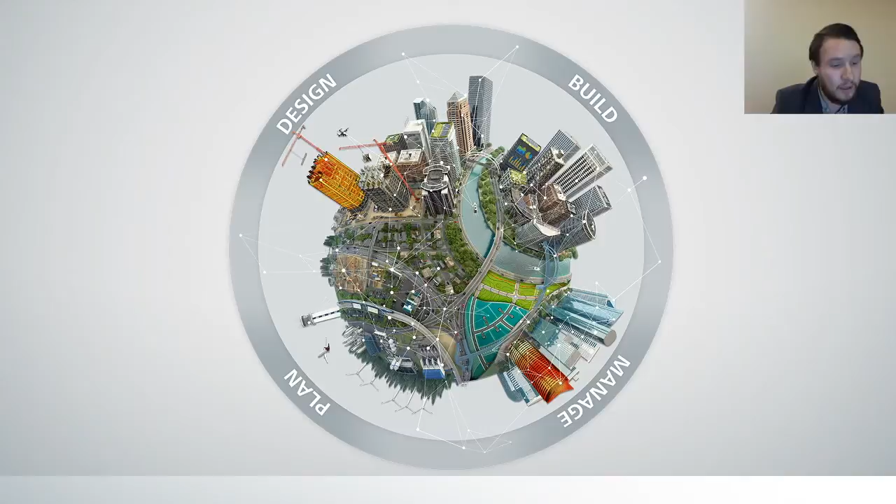Also, you can divide those phases into more cuts. So you can analyze the project, you can have documentation of the project, you can have fabrication, construction in 4D and 5D in time, construction logistics, operation and maintenance, renovation projects, and lastly programming after the building is already built and the owner wants to know all the information that is inside this model.

So the users of BIM. The BIM model could be used by all of the architects, engineers, structural engineers, and the circle goes on until the building is demolished. So building information modeling, BIM, is an intelligent 3D model-based process that equips architecture, engineering and construction professionals with the insight and tools to more efficiently plan, design, construct and manage buildings and infrastructure.

And you can see why you should use BIM. You get a lot of benefits from it. Most BIM users get a lot of benefits: it can reduce errors and omissions, reduce rework, reduce project duration, increase profits, and maintain repeat business.

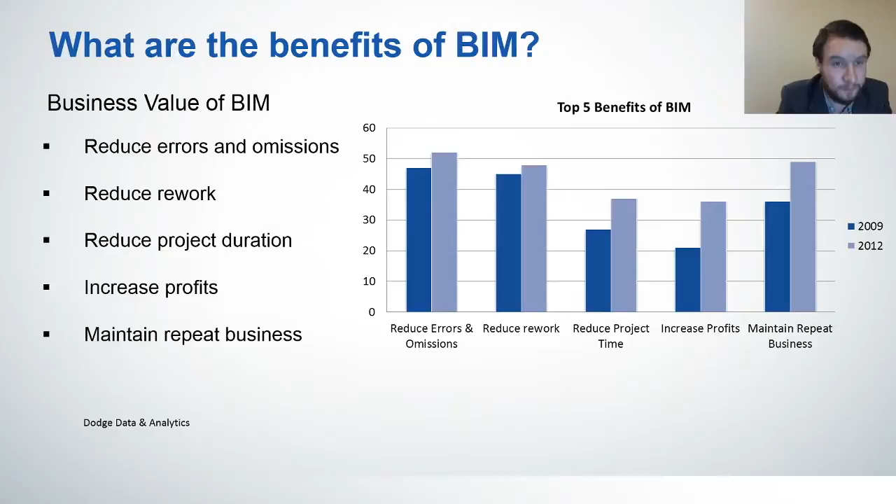So next we're going to talk a little bit about the software that's good for creating building information models. I really like this one chart that shows what software you should choose for working as an architect or an engineer. As you see, if you go throughout, there's Revit here and here. It's like saying BIM all the way.

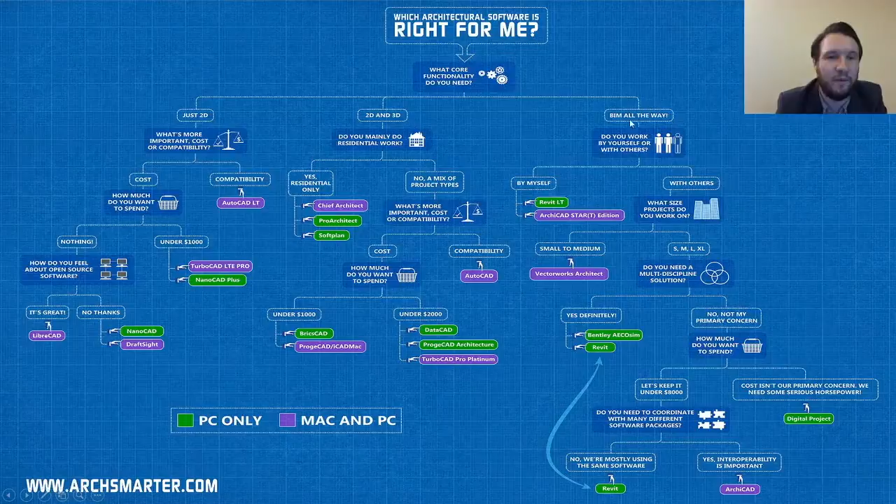And next, we'll talk a little bit about Revit. Revit is software specially designed for BIM, because it has everything needed to put all of the models into one and make them work together, not only for one person but for the whole group of people, architects and engineers.

What's really good about Revit is that it's interoperable with CAD. So there are a few things that are really good about that. At first, if you are going to work with Revit and you don't know how to create a BIM model, you could try working with CAD first and then go to Revit. There are a few things about Revit that are a little bit similar to CAD software.

So Revit has true 3D design. When using Revit you work with architectural models rather than geometry. You work with the whole model, not just the plans. With Revit you can switch among views and schedules as you like, because you create a parametric building model. Dependencies are automatically updated as you make changes. So that's a really good thing.

Next are parametric objects. Revit has parametric objects, 3D parametric building elements which carry information about their relations to other objects in the building, in contrast with blocks and solids used in AutoCAD. So you can take a solid from AutoCAD and use it in Revit as a parametric object.

For example, in Revit, the properties of a wall can state that it should rise to the next level or the roof, like you have the first floor, second floor, and so on. After you specify this property, the wall retains its relation to the next level or roof regardless of other changes you make to the building.

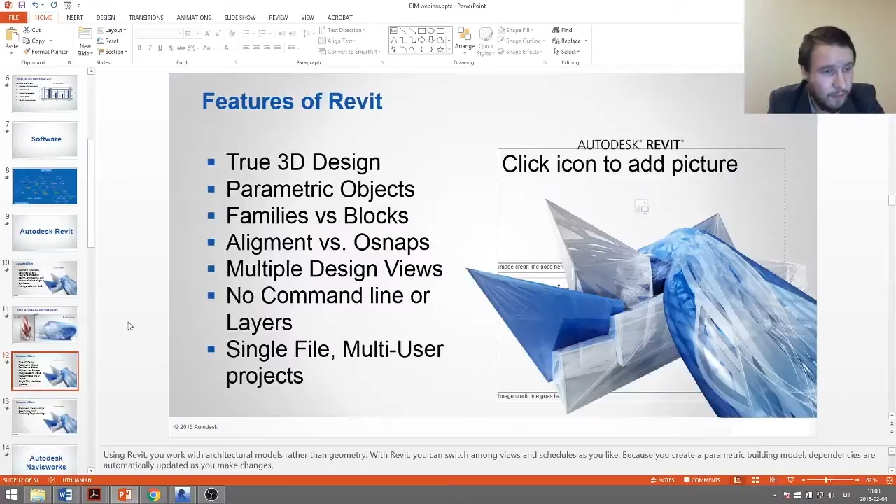So AutoCAD users will notice the absence of the command line and layer control feature. In Revit, building tools are components on ribbon tools. Visibility of components is controlled through the visibility graphics override features, which work on a per view basis, comparable to AutoCAD's freeze/thaw by viewport and color.

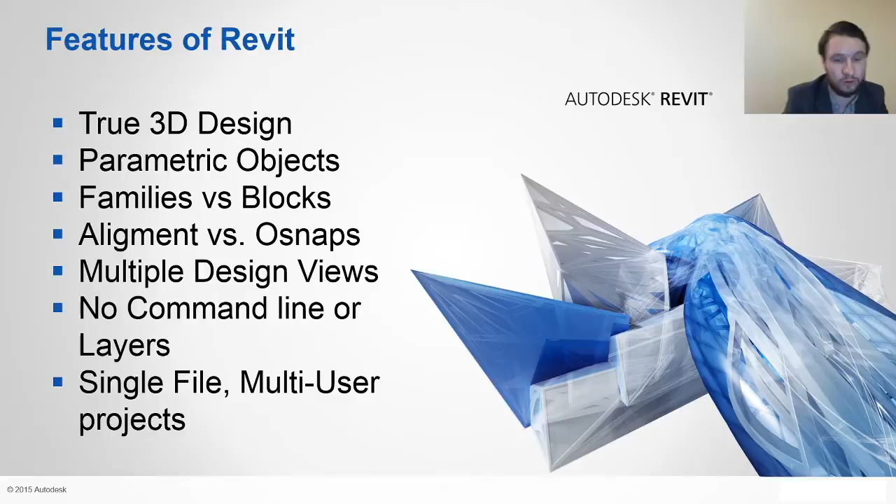And then we're going to see about the parametric relationships. By using dimensioning and alignment locking features in Revit, you can place building components in relation to others and keep them that way throughout the design. You can lock components together in more than one place to preserve wall alignments, room areas, or door and window placements, even as the model is being altered in other areas.

Component relationships may be constrained or overwritten at your discretion. Dimensions may be locked or editable while the parent objects behave accordingly. Because objects can be aligned and locked into place, repetitive editing commands are reduced, allowing faster work and fewer errors. Revit also understands DWG CAD files, so you can link or export them, as I will show a little bit later with the practical work.

And producing paper drawings. So in Revit you can draw all the drawings, put them in the sheets and export them to AutoCAD. It's a really good tool because you can have a lot of multiple sheets, a little bit similar to AutoCAD layouts, but as you see it has more parameters than that.

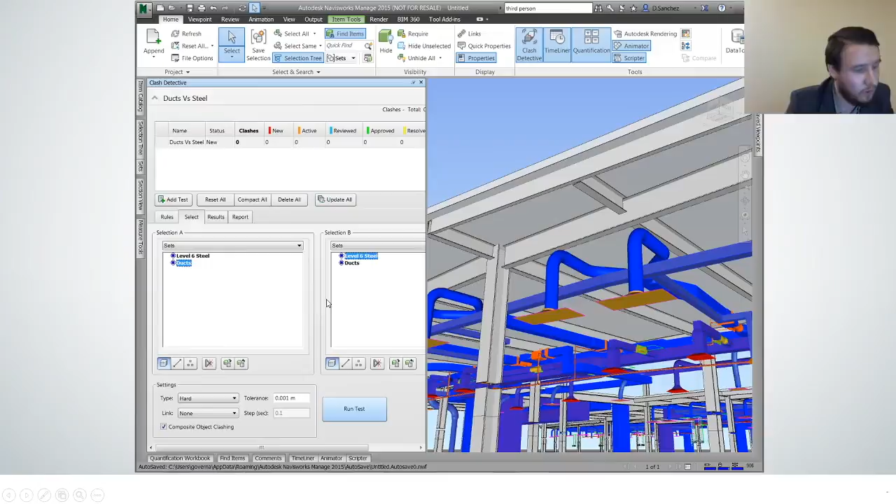So this is a screen of the Navisworks software where you can import one model of the structure of the building, then import a second model of the MEP, like pipes, and then you can choose which elements you want to check for clashes with other ones. When you run the test, it shows all of the clashes in that model, so you can check them. The view will guide you directly to the position of those clashes.

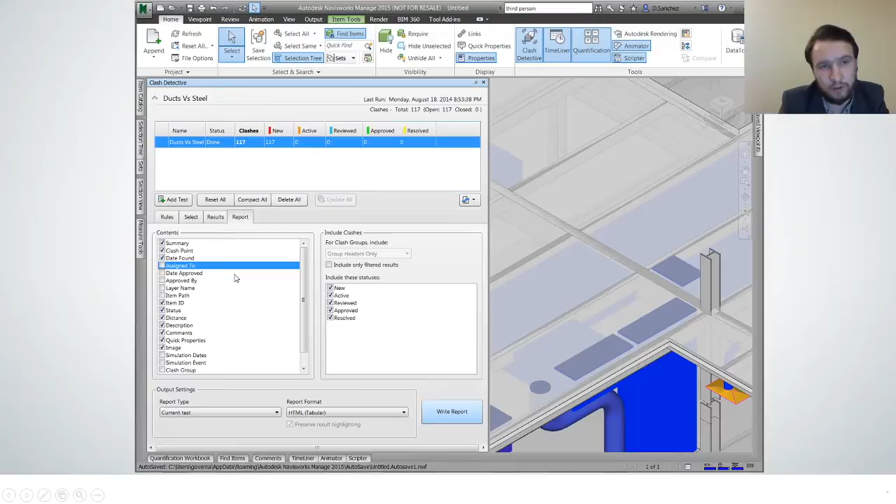And next you can have a report of those clashes, and you can send it to another contractor to see how to solve these problems.

The next thing you can do in Navisworks is project scheduling. You can take a model you created in Revit, put it into Navisworks, and you have all of these elements here which you choose, and you can create all of these schedules. There are two possible ways to create a schedule in Navisworks.

You can do a model takeoff, which means that you schedule the elements exactly from the model. You create some selections of the elements, then create schedules, formulas, and all the parameters that you need, and you have a schedule of these elements.

The second way is to create a virtual takeoff. Sometimes you have to create a schedule of elements that are not modeled, like some small things that are not in the model. So you can create a virtual takeoff. You create new parameters associated to a model, you can write formulas, and then you schedule the virtual takeoff.

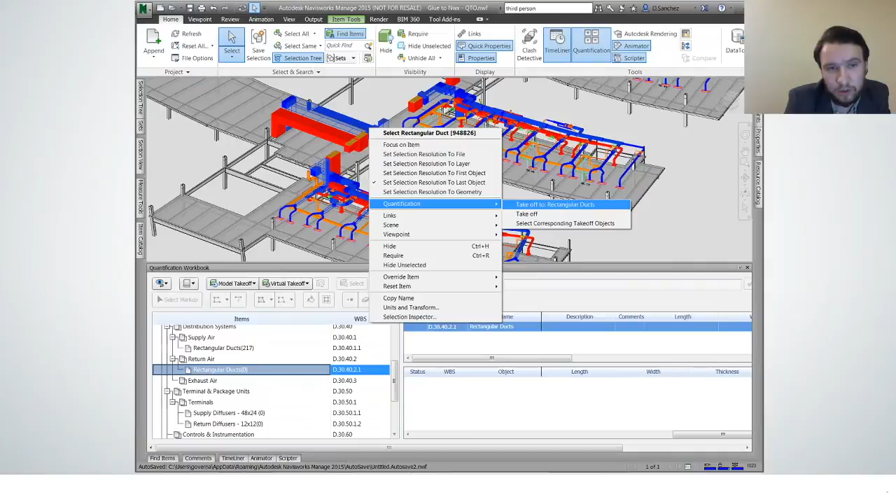So you see, when you create a quantification, you choose the elements, and there you go, you have all of the elements, the length, the width, the height, and all of the parameters. So next

tool in Navisworks is photorealistic renderings. You can also do realistic renderings in Revit, but in Navisworks it's a little bit faster and easier because it has the same materials. So this means that the customers can use all of these softwares together.

You can create a model with all the materials in Revit, and you can render it, because it has the same library of materials inside Navisworks, since it's software from the same Autodesk product line. So you can adjust lighting, exposures, and so on. And after creating a rendering, you can just export it and save it.

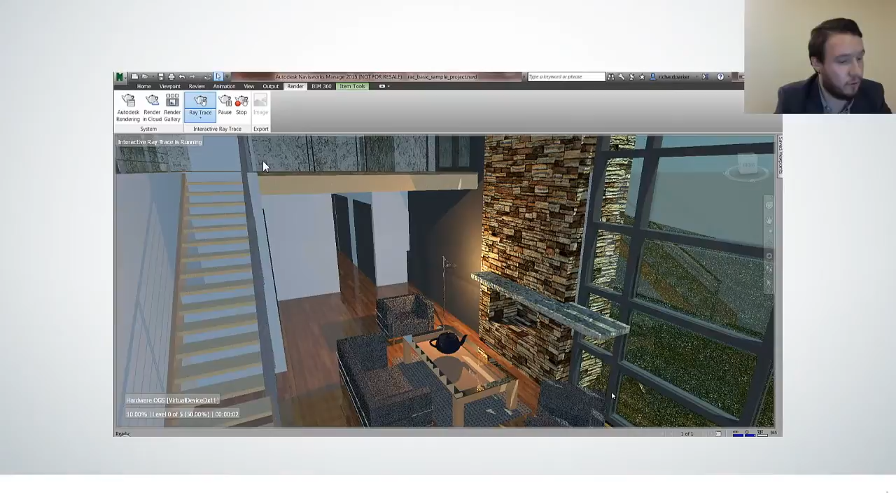And I think now we're going to see the practical work, where we're going to take a sample of the Revit model and see how it works and all the settings for AutoCAD, and then we're going to do some linking of the other Revit model and see how these parameters are working.

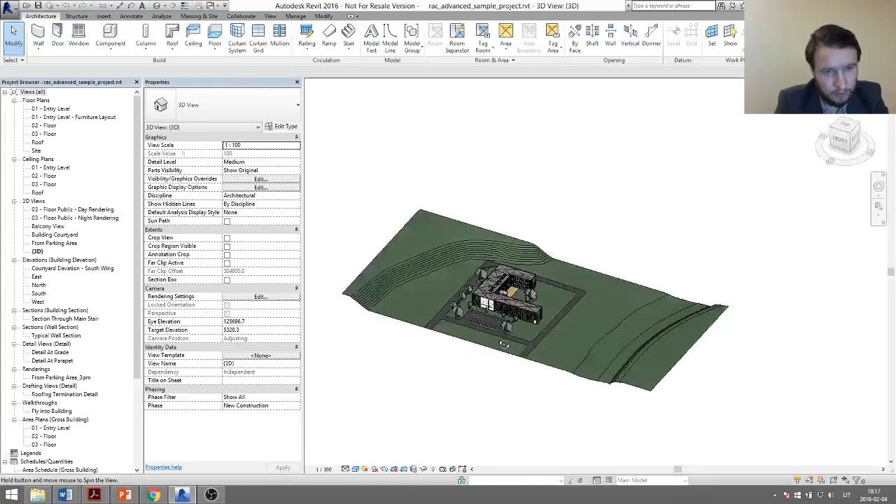So going to Revit, you see now we have a quite simple model. As you can see, we see it in 3D. There are all of these plans, elevations, sections, and so on.

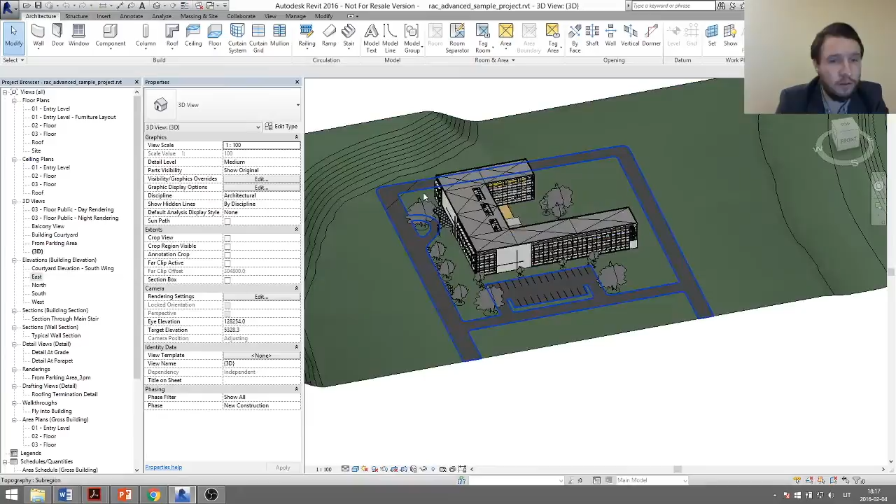So first, when we have a model, and let's say everything is already created, modeled, and annotations are the way they should be, now we're going to create a sheet where we put those drawings and export them into CAD. So in Revit, when we are creating sheets, we go to View, and we can choose all of these title blocks that are different families.

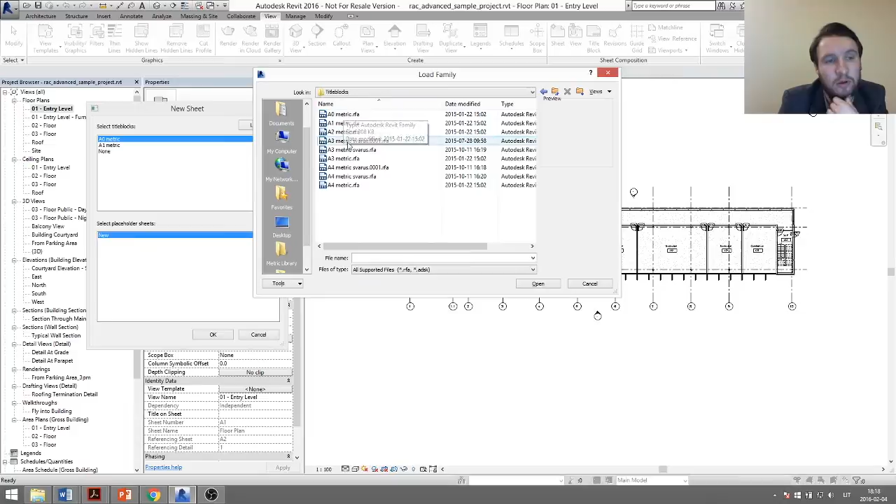So we can load some default title blocks. You can see all of these, or we can use those that are already loaded into the project. When we load the title blocks, we get them as sheets in another part of the project browser. So as you see, we have one drawing already filled inside the sheet.

As you see, the sheet has all of these parameters. You can write them down. Some of the parameters are the same across the whole project, and some of them change sheet by sheet. So if you want to write down a parameter like the project name to go through all of these sheets, you go to Project Information, and you can write down the

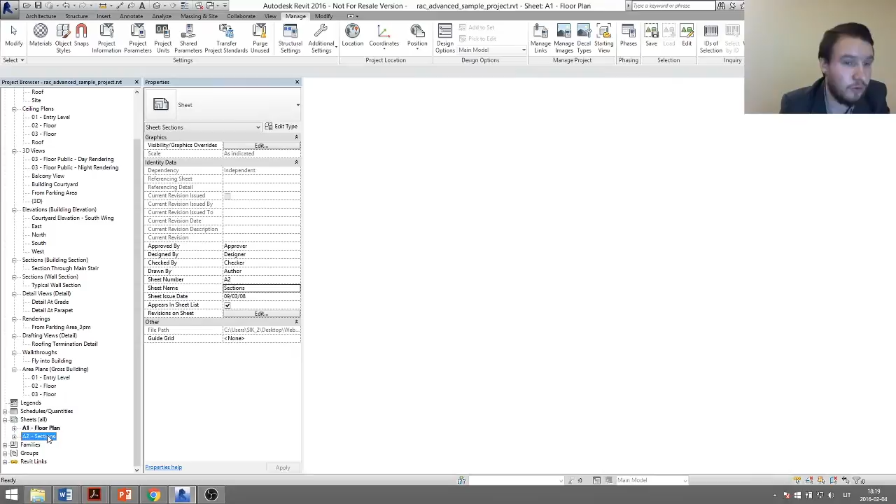name of the project. If I just change it a little bit, you see now it's going to be project name. And if you go to another sheet, the same parameter is inside of that. Oh, it's a little bit clashing, so we can make it a little bit smaller. And if you want, you can change it to be longer and so on. You just have to edit the family of the sheet.

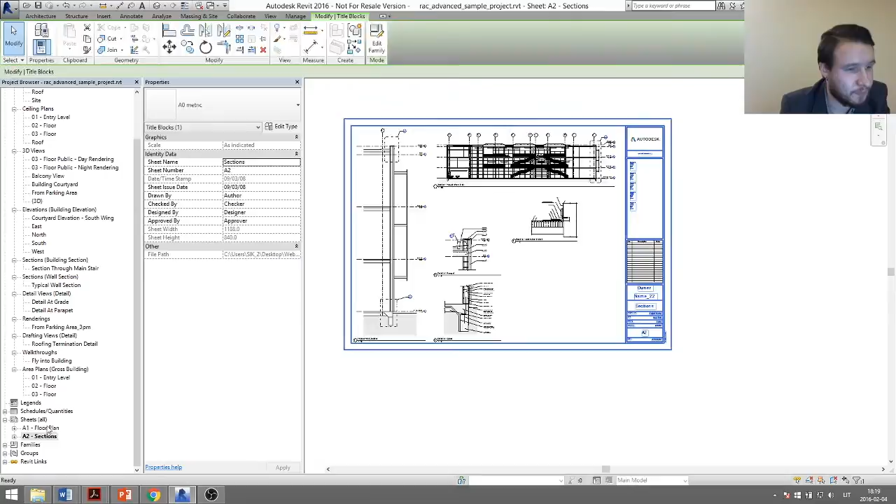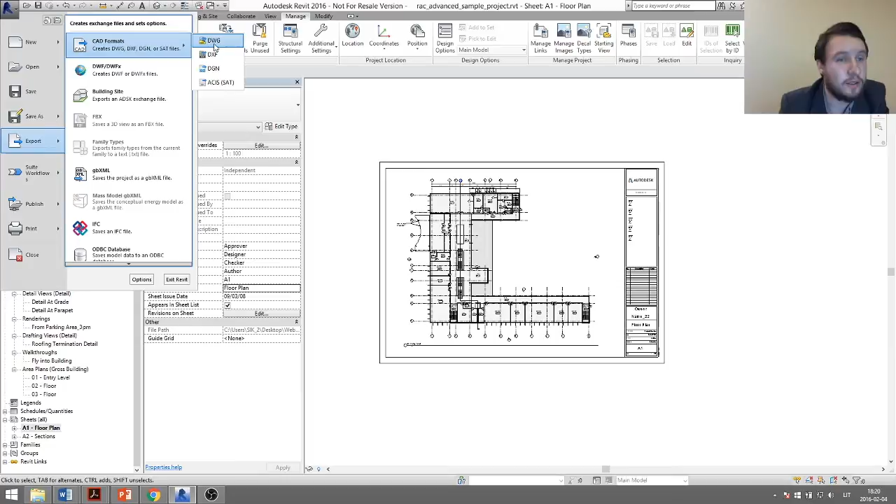So when you have a family of the sheet and the drawing inside, we can export this drawing to AutoCAD. Revit exports everything to AutoCAD quite smoothly. We have all of these settings. We're going to export CAD drawings as DWG. When we export, we can see we have an export setup. We can change it and modify it.

So we have all of these settings inside, and we can export those settings into another project file. It's not directly exportable, but if you create it, you can save it in a file and use it in as many projects as you like. As you see, we have these Revit model categories. It's quite similar to AutoCAD layers. It's not the same, but quite similar.

So if you see, we have elements like walls, doors, rooms, pipes, and so on. All of these elements get a layer, which is going to be in AutoCAD. So you can change the layer name if you want. You can just rewrite it. You can choose the color of that layer,

and so on. In Revit there are a few categories of elements, like model categories. These are the 3D elements, like families, objects, and so on. And there are also annotation categories. These are elements like dimensions, tags, text notes, and the like. So when we have those names and IDs set correctly, you just save it and you have all of this for another time.

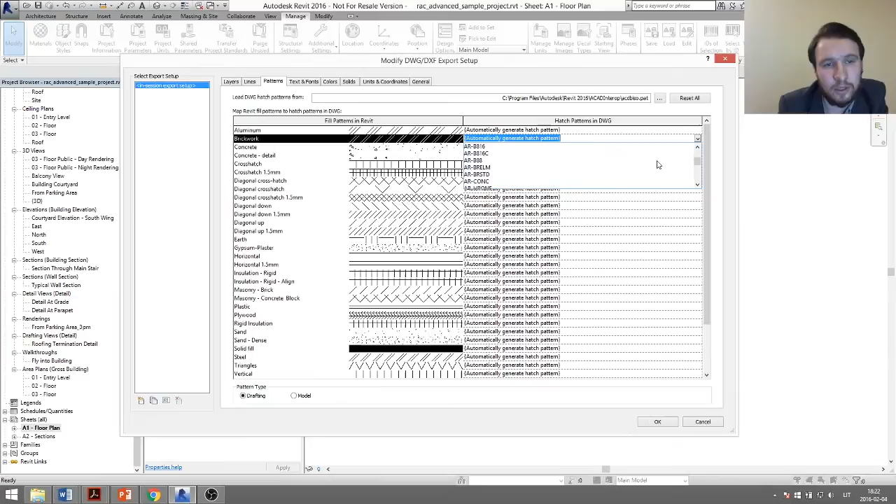Like you see, there are lines. Now you can set the patterns. It's like the hatches; you can select the hatches in AutoCAD if you know the name of these hatches, the text, the font sizes, and so on. Then a few settings: you can export it as a solid, polymesh, or ACIS solid, coordinates and units, and general. So it's just a format and some other settings.

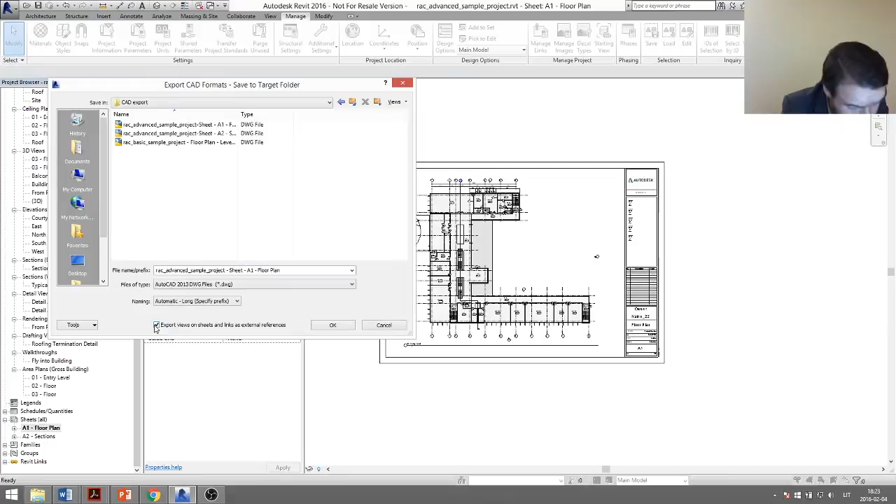So when you have all these settings set correctly, you just press OK, and you have an export. So you can save a set, and if you're going to export, just go next. Just take a look at the directory where we want to put the folder. You see, there's one thing when we press this tick mark. If you export it like now with this tick mark on, you will have two drawings, one for the floor plan and the second for the sheet view. So I can take it out, and then I will have everything in one file.

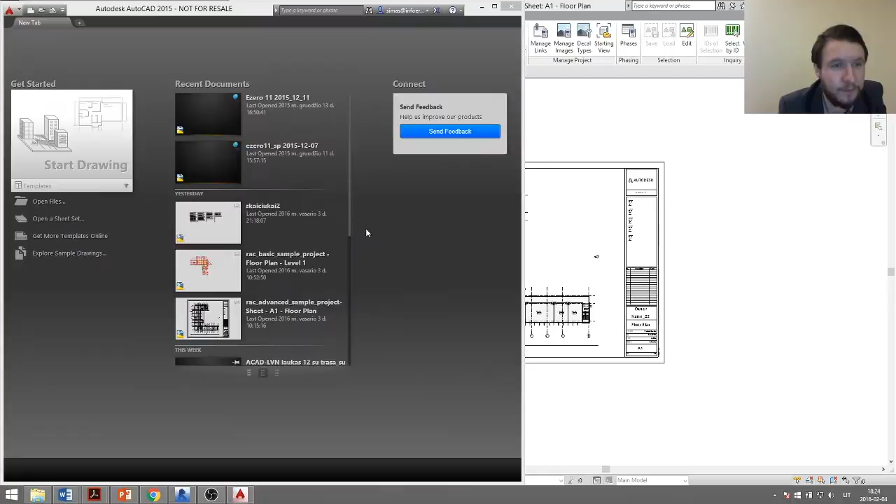And if I export it, it's exporting now. Okay, it is exported. I'm going to open AutoCAD to see how it looks. Sorry, AutoCAD is loading. Yeah, here I'm going to CAD export files. These are the files that we exported. Let's see how it looks in AutoCAD.

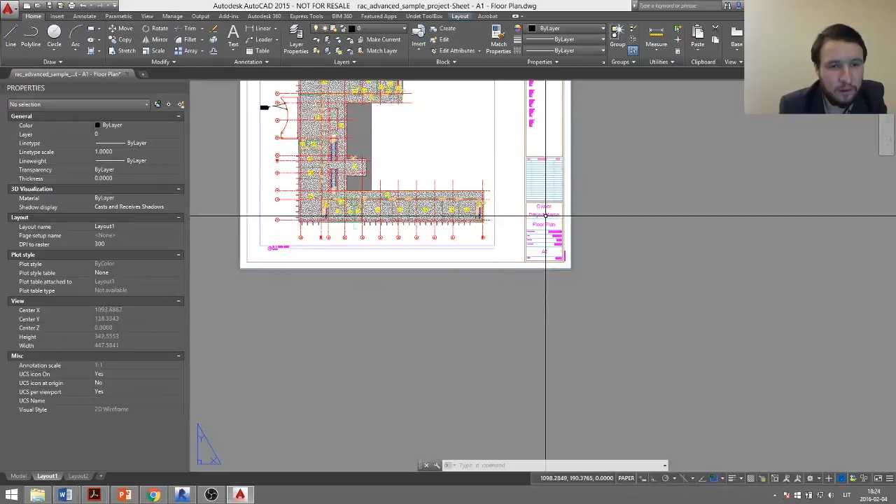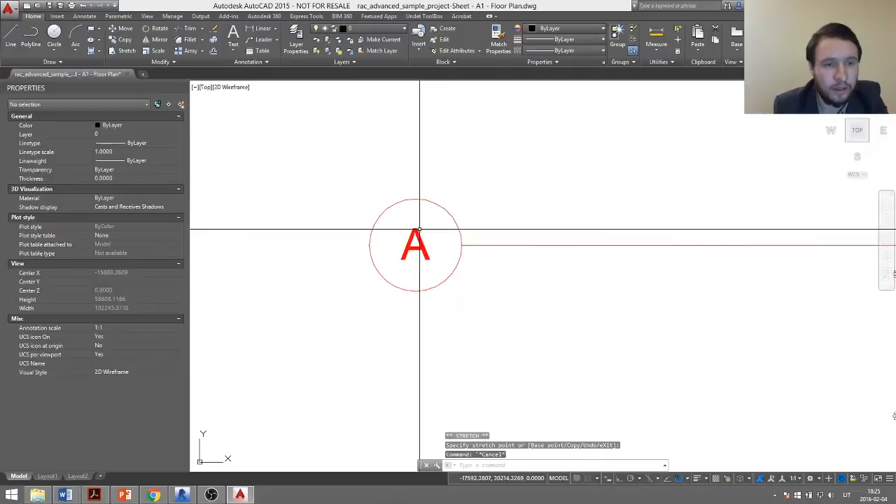So as you see, the sheet is exactly the same as in Revit. So we have all the sheet, all those names, and we can change it if we want. And if we go to model space, we can just edit the model. You see, all of the lines from Revit are working perfectly, as in Revit. You see all those line styles are here. Text, you can edit it, and hatches also work as editable.

So there's no problem. If you don't know how to do everything in Revit correctly and you need some additions in AutoCAD, you can just export the drawing and put everything together in AutoCAD.

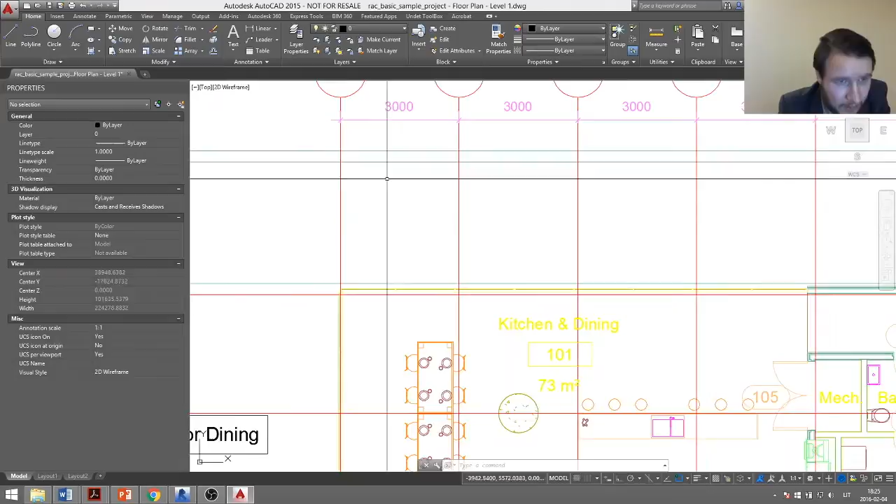So the next way, we're going to do the opposite. We're going to take an AutoCAD drawing. This is just a small simple drawing. It's from the Revit sample. So we have all these grids, layers and so on, and we're going to put that drawing in Revit. There are a few ways to put AutoCAD drawings in Revit.

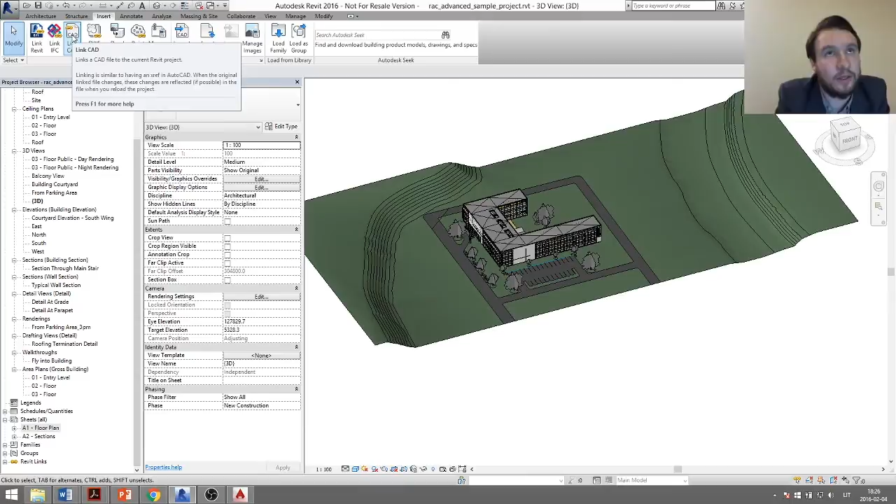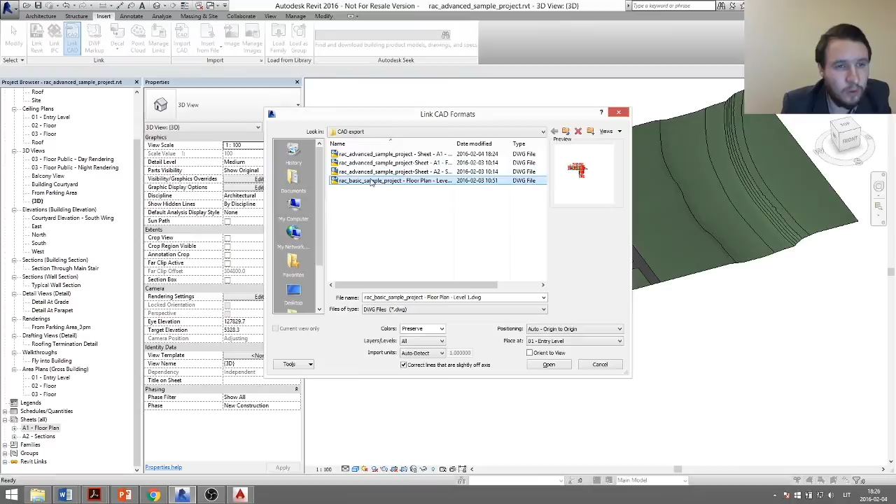You can link them. Linking CAD is more like Xrefs in AutoCAD. You just take the drawing, select the drawing. Yeah, this is one. You just select all of these settings with the positions and the placement. You can change the units if you're not sure what units you are using, and then open the CAD. I see it's over here, but I can bring it somewhere I can see it.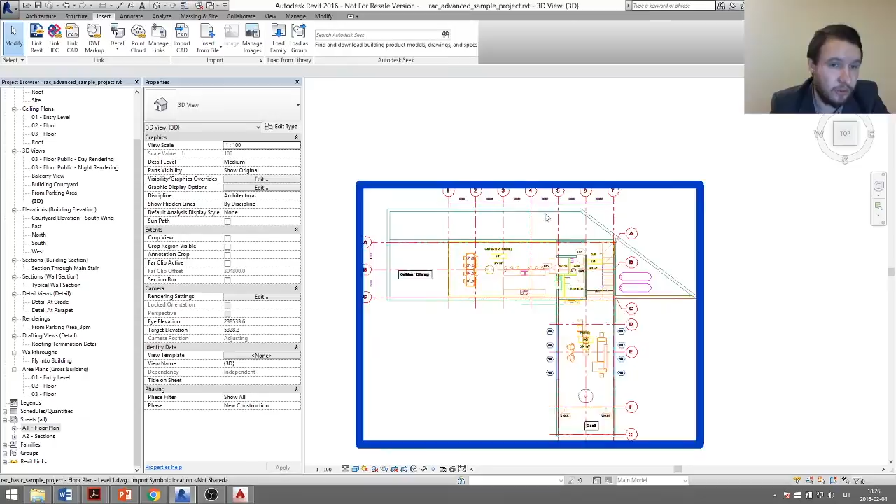So as you see, now the drawing is like one block, and if I want to create a model in Revit from these AutoCAD drawings, I can use Revit elements like walls, and it's going to snap all over the CAD, or I can simply convert it, by selecting elements and converting them into anything I like: floors, walls and so on.

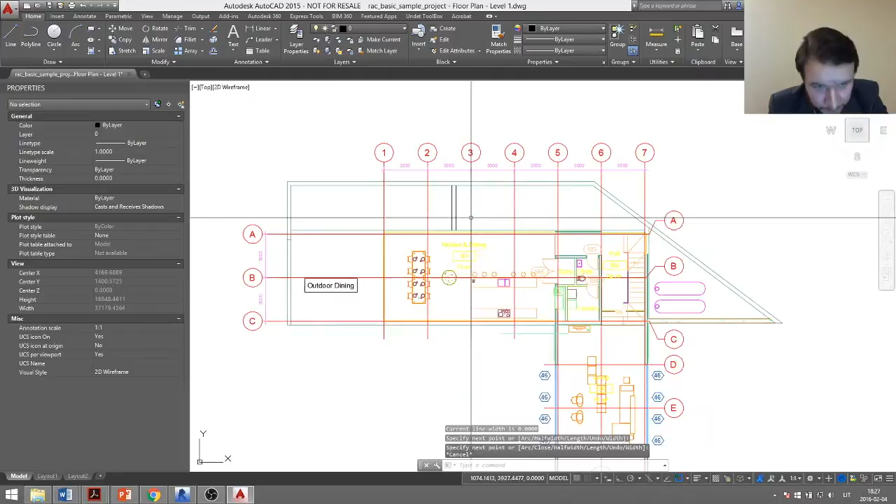What's the main thing about linking drawings in Revit? If we change the same drawing in AutoCAD, it's going to change here. So if I go back to AutoCAD and draw some new walls or some new lines, we will see if it changes in the Revit file. So just a few. Okay, I will save that drawing. Okay, I guess now it's saved.

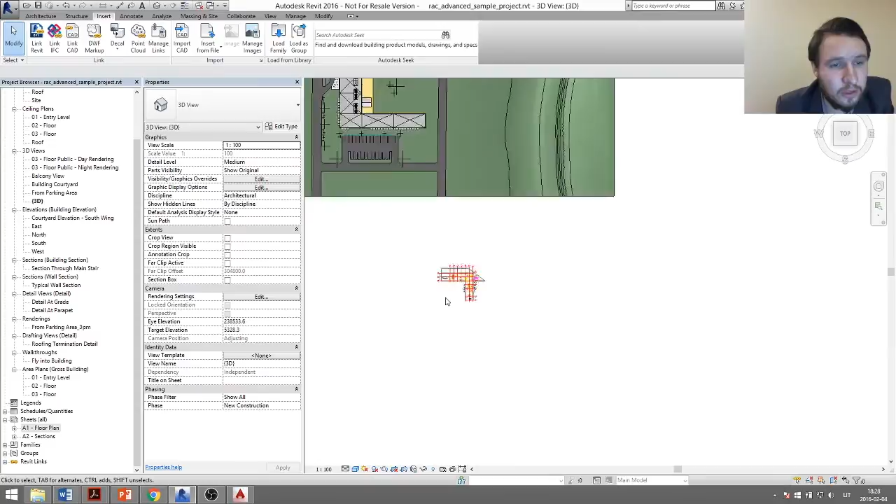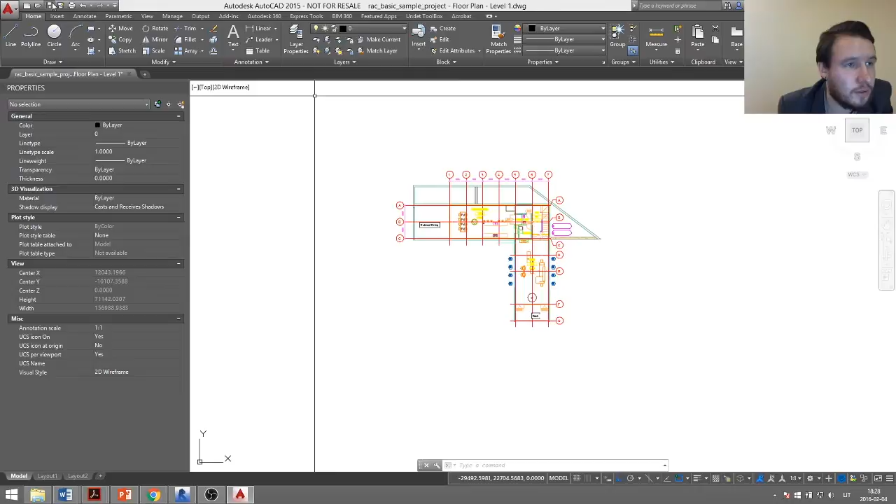If I go back to Revit, I have to reload the model. Once the model is linked into Revit, we have Manage Links, where you can see all of the drawings that are linked into my Revit project file. You see this one is linked, and I just have to reload it. Oh sorry, it's not the same. Reload From. Let's see if the names are correct; yeah, everything's okay here. Basic sample floor plan. Okay, I just take this one and reload it.

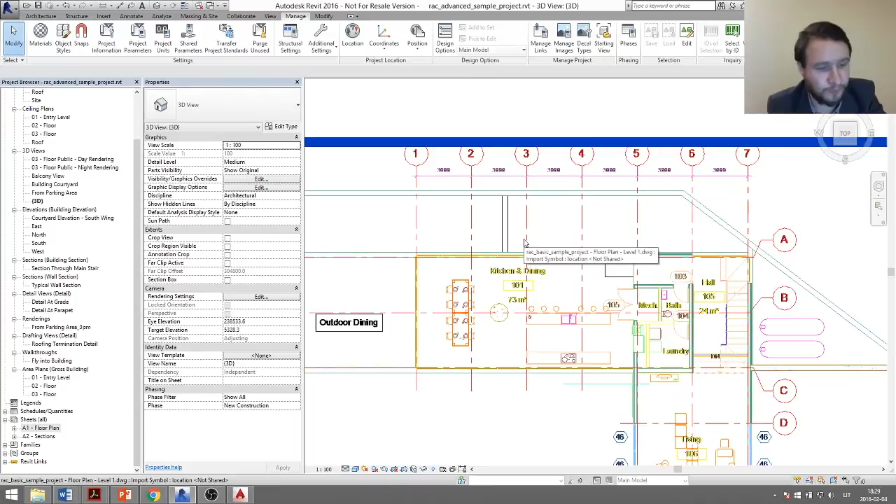And you see all of these lines or walls that I drew in AutoCAD are put back here in Revit. So it's quite an easy thing to do. It's not a new way, just simple working with AutoCAD.

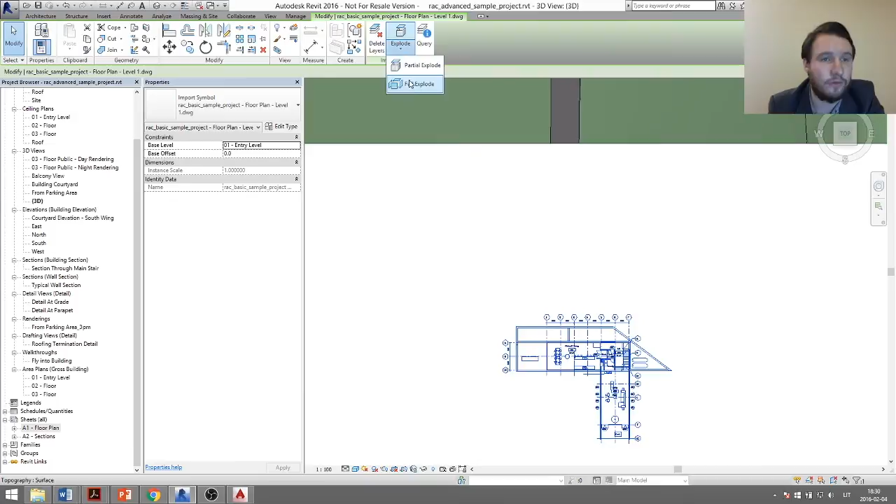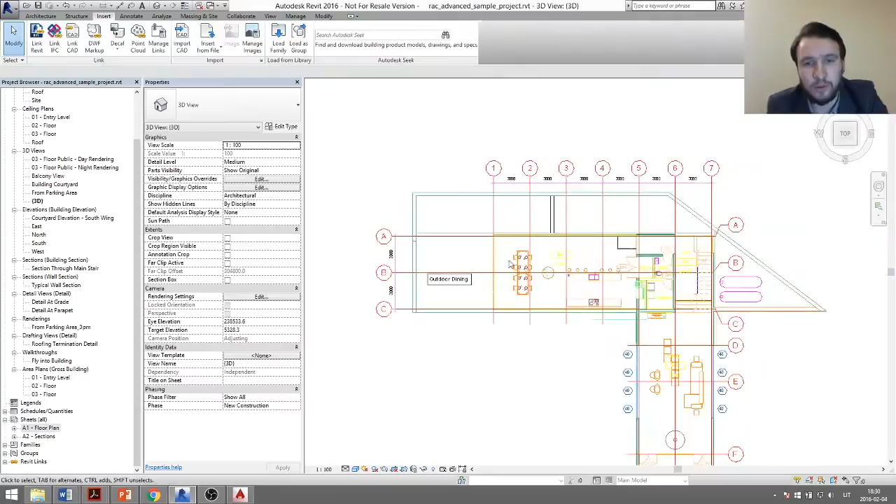I can do a full explode or just a partial explode. So if I explode it one time, you see all of these lines that are created in AutoCAD are editable in Revit. I can edit, I can change the texts, I can delete anything I want, and so on. So that's basically the main differences between linking CAD and importing CAD files into Revit.

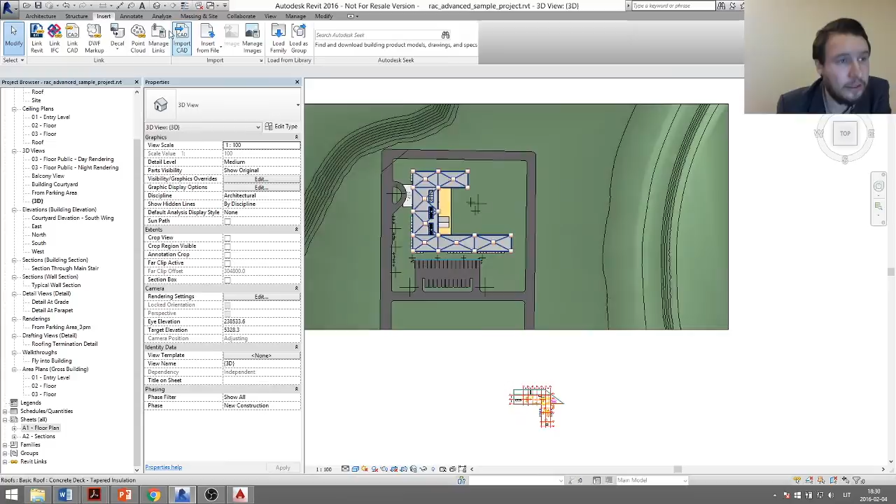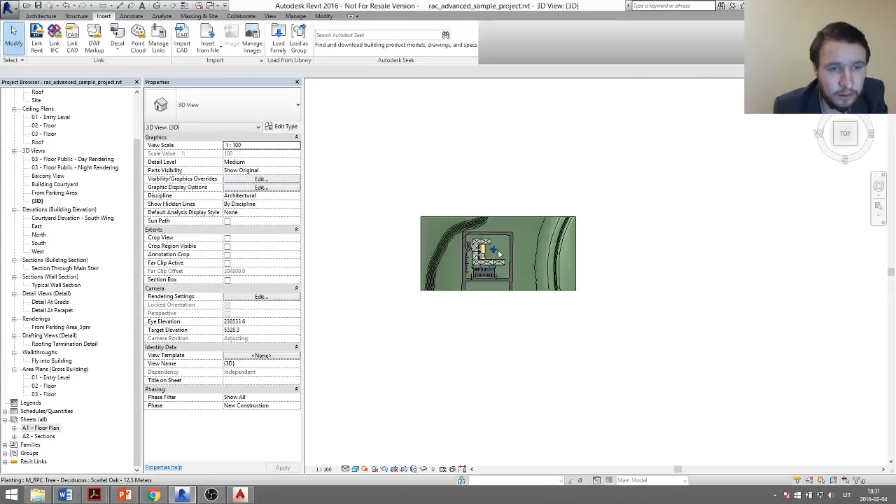So next, what we're going to do, we're going to take a similar file and link Revit into Revit, and see what are the visibility and graphic settings inside of Revit. So for now I'm going to delete this one. Okay, let's take another Revit file and insert it into our project. So I'm just going to check where the file is. Okay, oh, I've already inserted it. I'm going to unload it, remove it, because it won't duplicate.

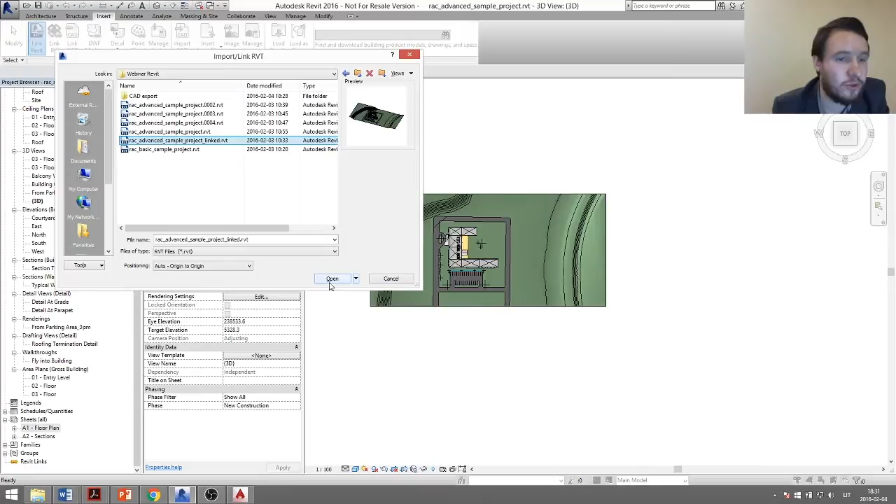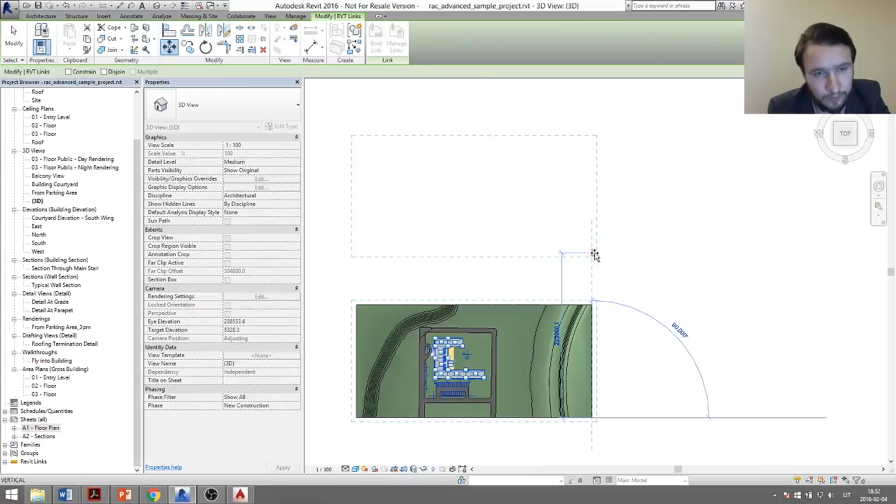So I have a file, and I'm going to put basically the same file inside our project. So I'm going here and I'm linking Revit, another model in our model. I'm taking the same file, and I will show you how to make visible just the things that I want to see, not all of the file. At first it's going to be like the same file. Yeah, it's already here, but it's in the same spot. So I'm going to move it because I want to change it a little bit.

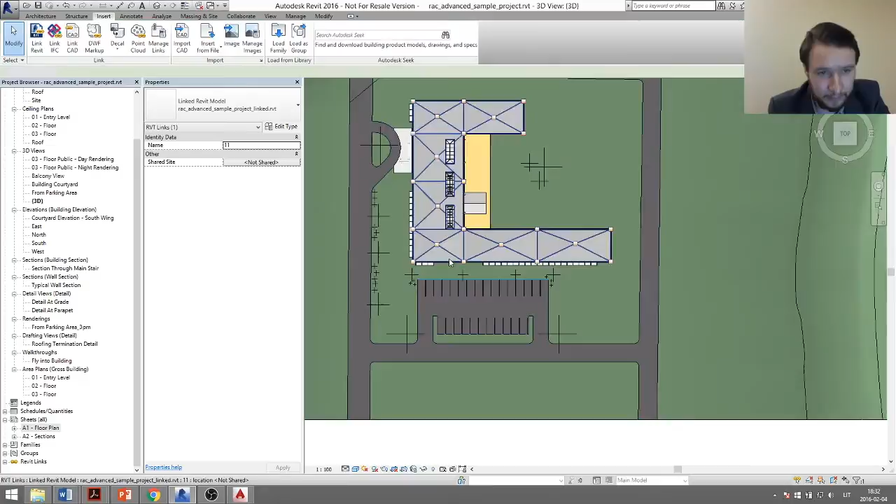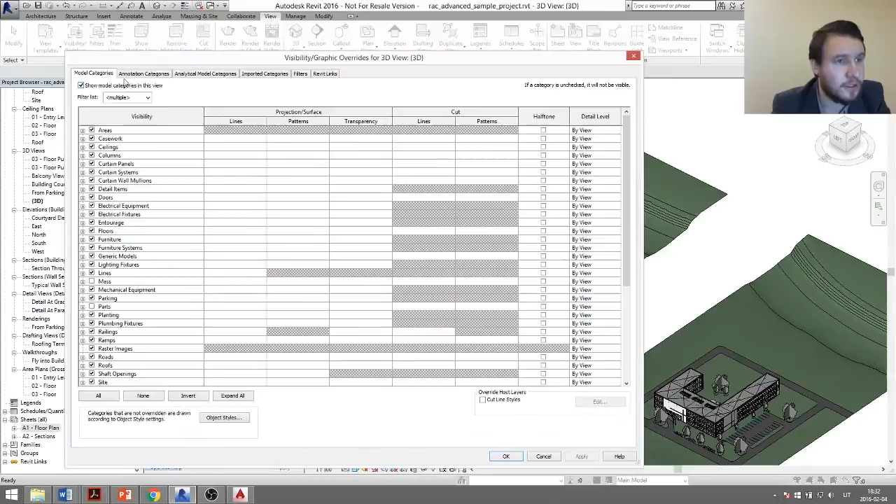So this is our project created in Revit, and this one is linked. You see, if I want to take some elements, I can do it in here, but in the one that is linked, I cannot select it by element and so on. And let's imagine we need just the building elements without the site, roads and so on. So if I go into visibility graphic settings, there's a tab that says Revit links. So I can select the link. You see, it's the same file name, and it says it's showing by host view. It means it's displaying the same settings as in the host view.

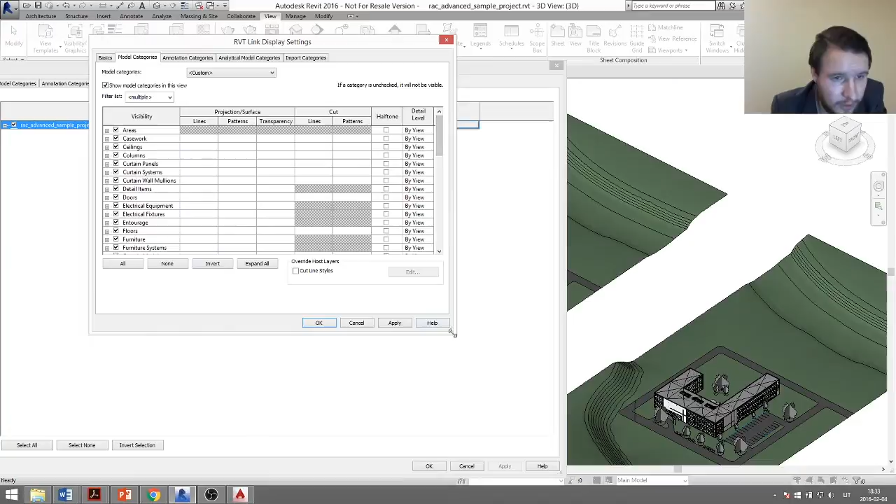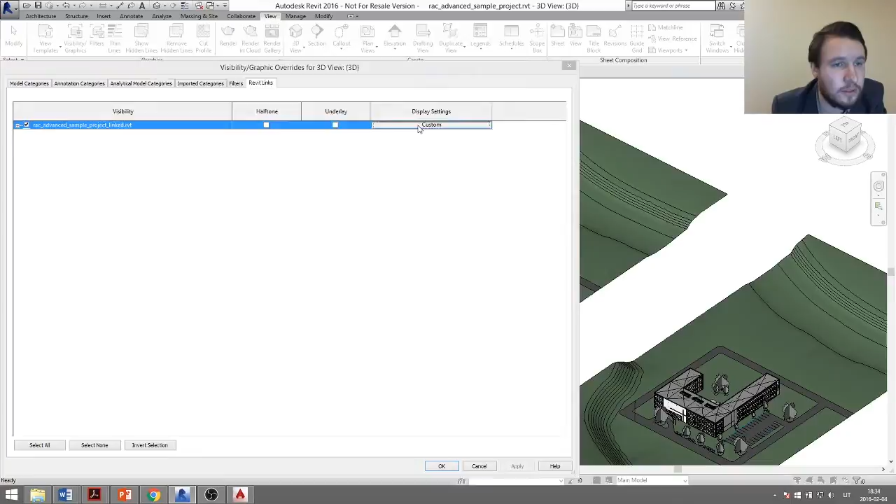So if I want to change the settings, I could select custom. I can select all of these settings like details, scales, and so on, but I'm going to uncheck some of the model elements. In custom parameters you see all of these model categories. So if I want to take out the site, I just untick site. Okay, apply, and oh, what happened? The site should disappear. I'm in a 3D view, Revit links, custom model categories, mass lines, site. So sorry, something's not working the way it should.

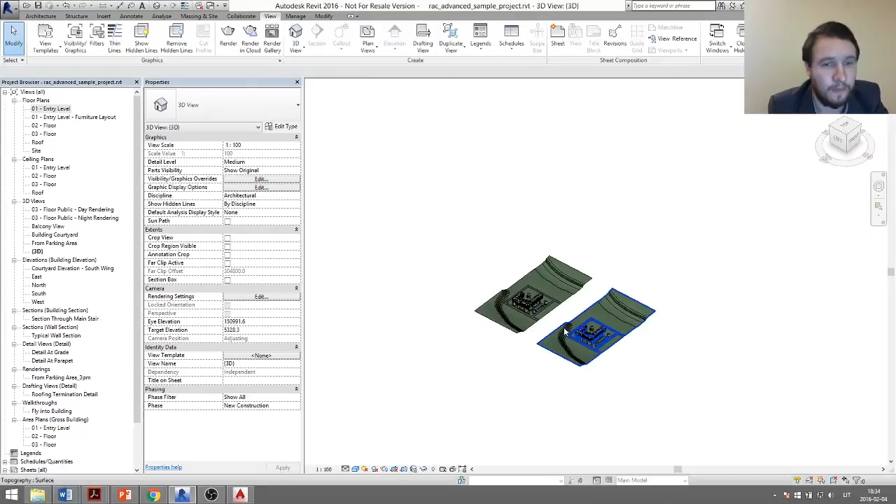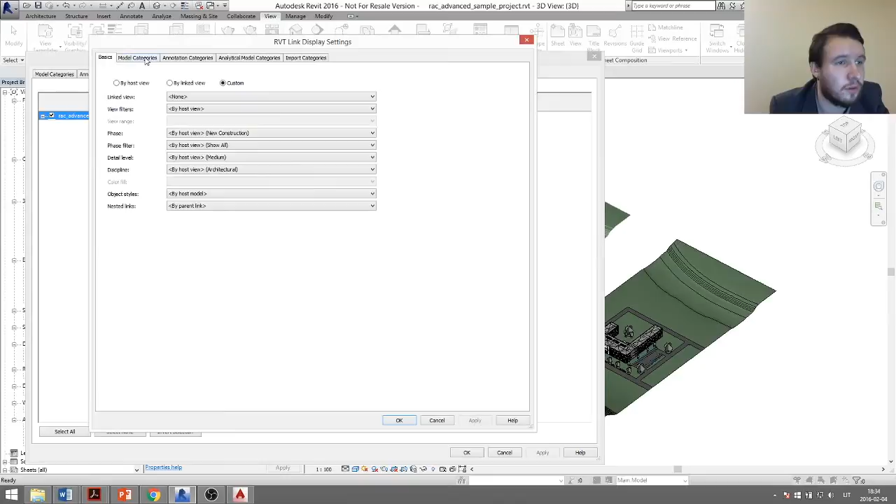Let's go to a plan view and see. No. Let's go back into the 3D. So again, I'm going to visibility graphics, Revit links, halftone, see, it's the same filters. It should work. Model categories, custom, do not show. So it works like that, but it's not working with the element. Let me see what's not right. So okay, let's do another one.

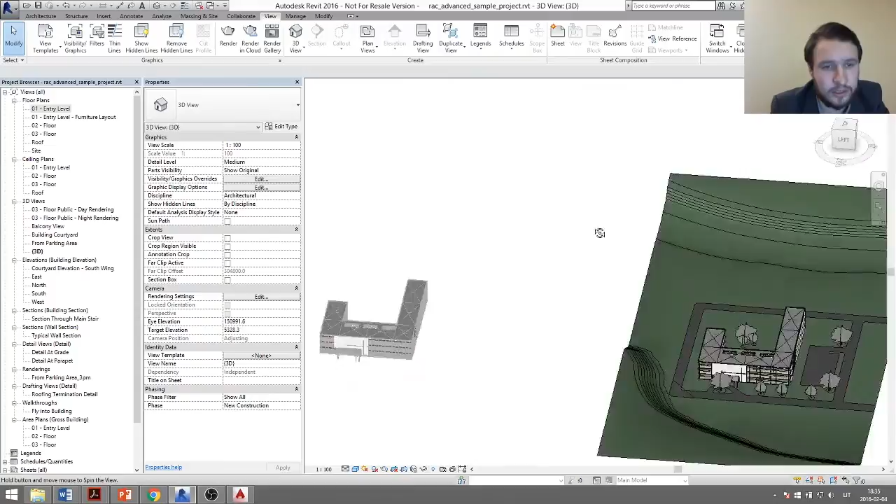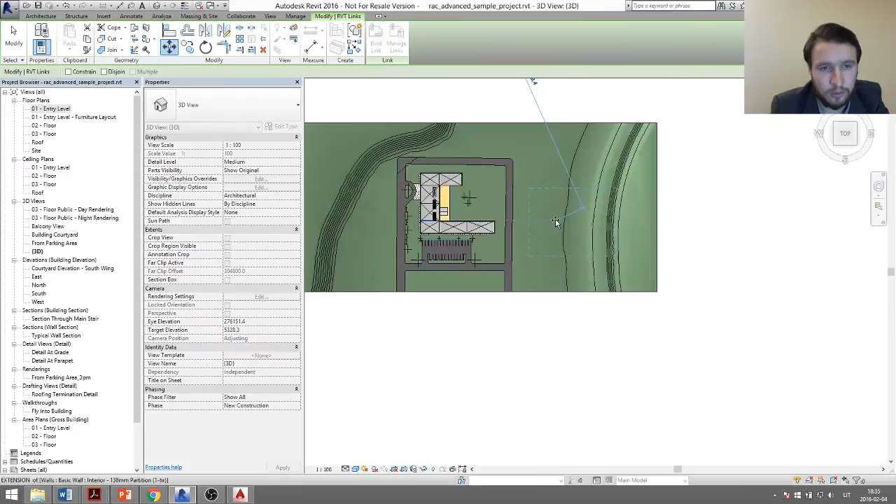Let's take out the topography, the planting, and what's more here, parking spaces. Where is railing, plumbing, parking spaces. Okay, apply it. Oh, it works now. So you see, now I only have just the model without the site and other elements. I will just set it back to normal colors. And if I want to put it anywhere, I can just drag it where I want it to be. It's a little bit delayed. So I'm going to put it here. I can rotate it if I want.

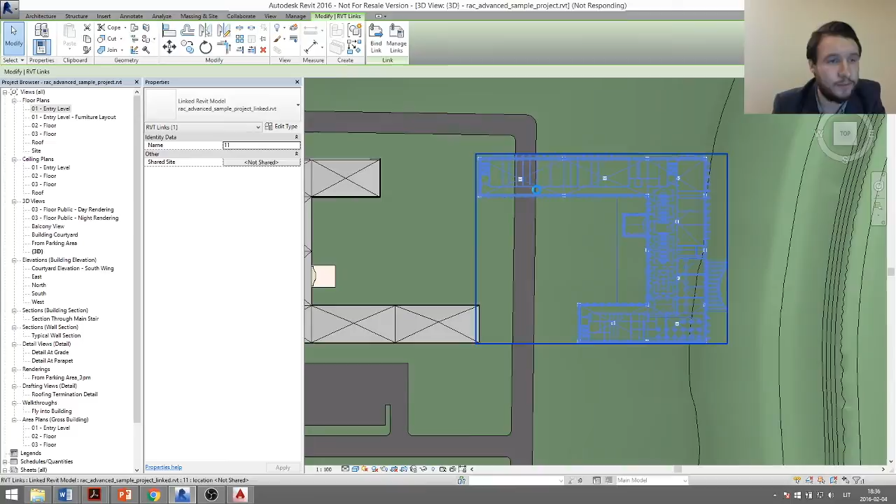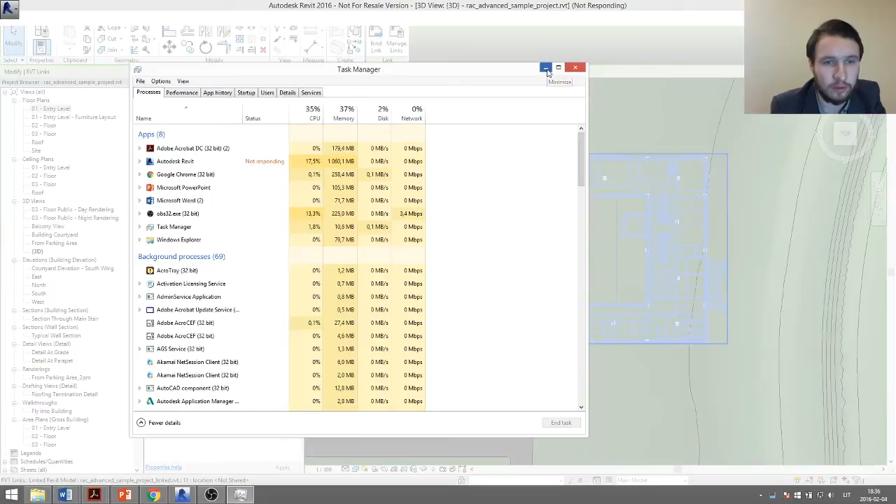I can move it anywhere, and it's not only in 3D, but if I go to a plan view, let's see. Oh, it's loading. Come on. Oh, it's not responding. Sorry guys. I can turn off the CAD. It should go back. Let me check. Not good. And I didn't even save it. So I think I have to shut it down.

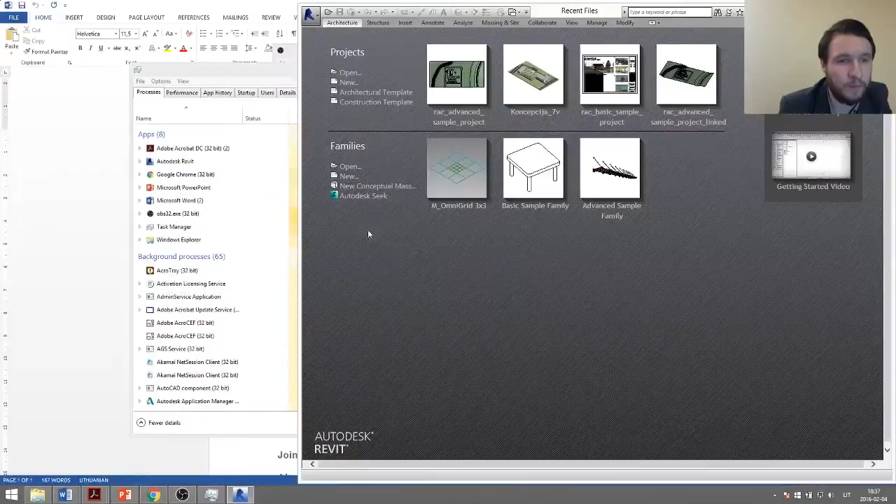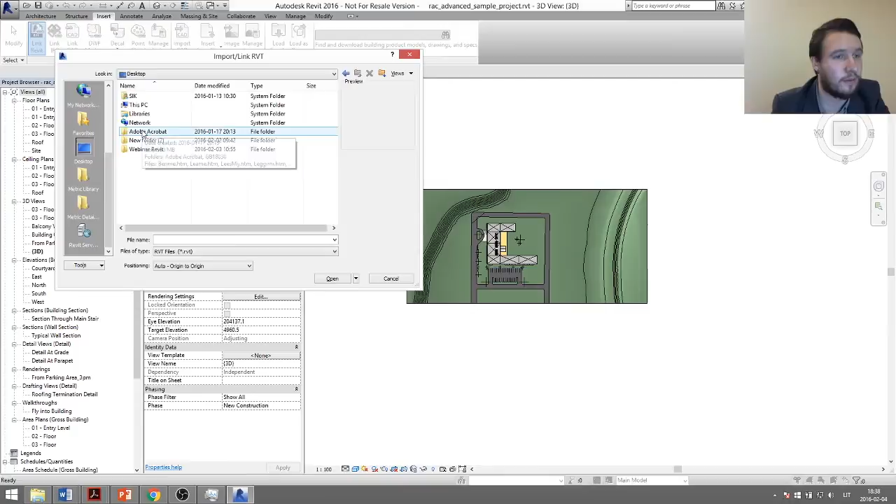So, but I think, okay, going back inside the project. I can link it once more, really fast. So I just go Link Revit. I just choose my directory. So take the file. Oh, it's all okay.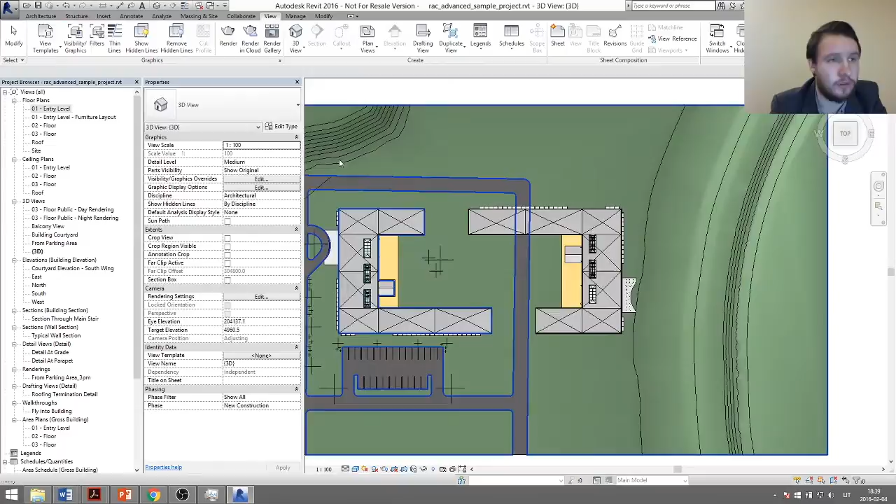And if you want to correct the visibility of the linked model, you could just go back to those visibility settings, and all of these visibility settings are different depending on the view, because if I were in a 3D view, I already have those settings custom, and I'm going back to an entry level and I have these settings by host, because you can set this up by view, for all the views that you are using.

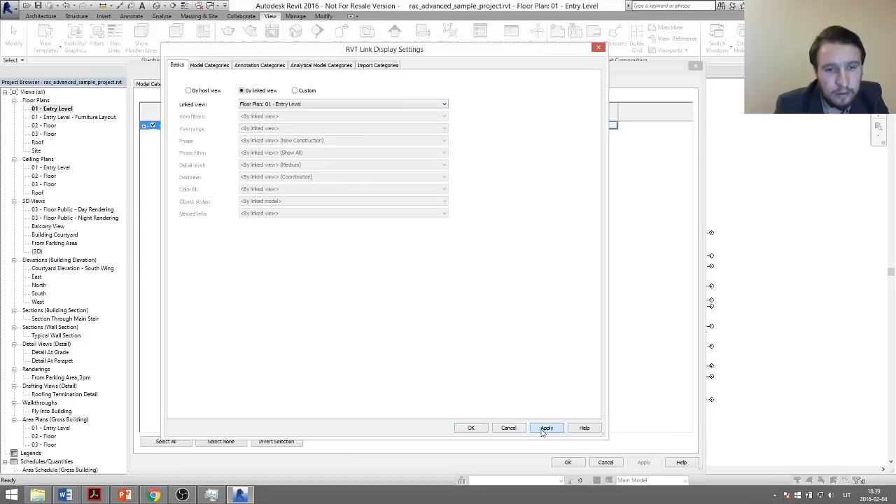But there are also ways where you can use templates, and you can put those templates into all the views you want. You don't need to select the settings every time in different views. You can just create it once in the plans, once in the elevations, and use it for all of these. So now my model is showing in custom mode, and if I select it by linked view and with the same floor plan, I can apply it, and you see now it shows all the same as it was in the first place.

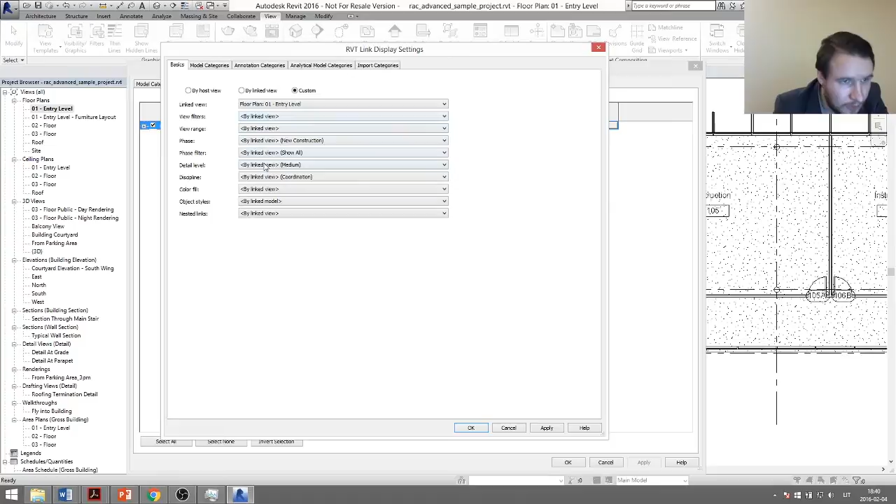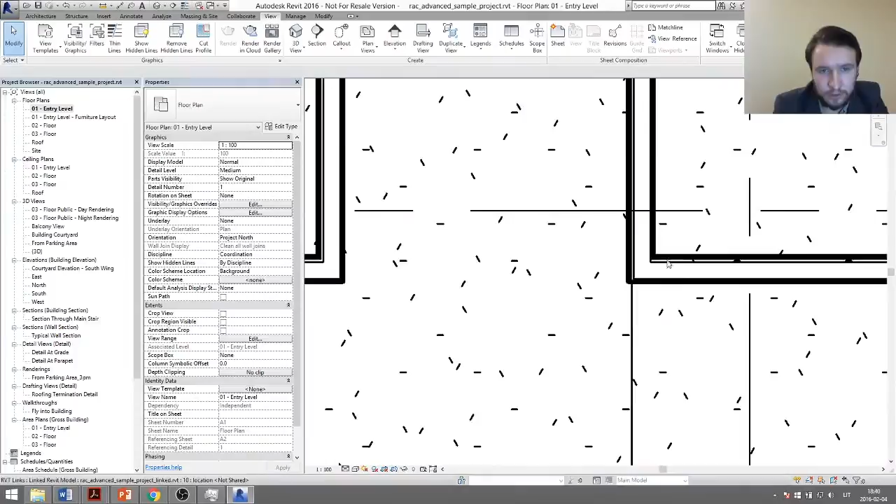So if I want to make it colorful or change the details, I can go back here and just now do custom, and I can change the detail level of the model. I can set it to fine. I can do discipline, color fills and object styles, like by model or by host. And if I go back, you see now my model has more details in the walls, if you can see, because it's pretty simple.

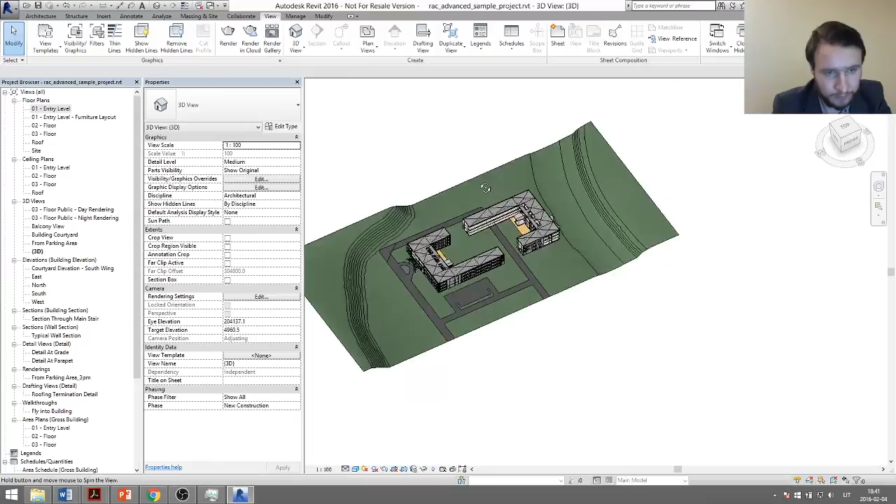So I think that this is about it, about getting from Revit to AutoCAD, from CAD to Revit, and from Revit to Revit. So let me see if there are any questions.

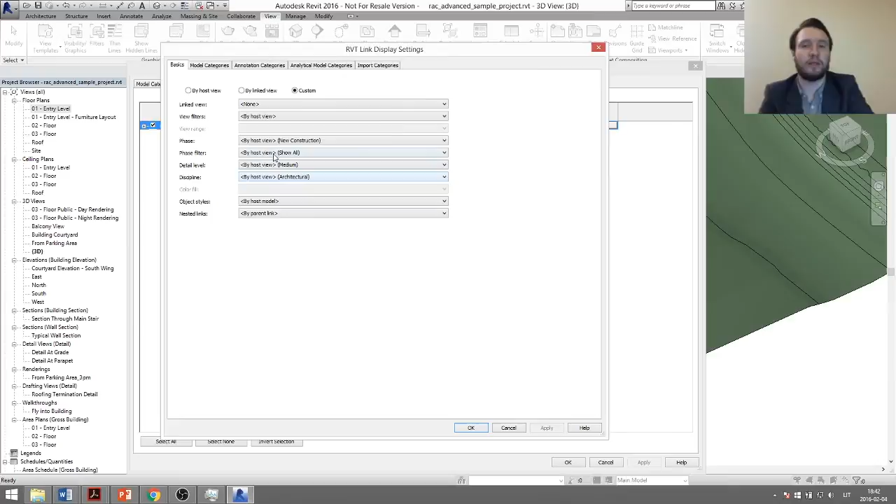One more thing about the model is you always have to be sure that you're using those settings correctly, because you can have it by host view. It means that it will show it the way the settings are in the host view, and there's by linked, showing it as in the linked project. And there's also custom, where you can change it in any way you like. As you see, all of these settings like model categories, annotation categories, import categories are basically the same as in the project itself.

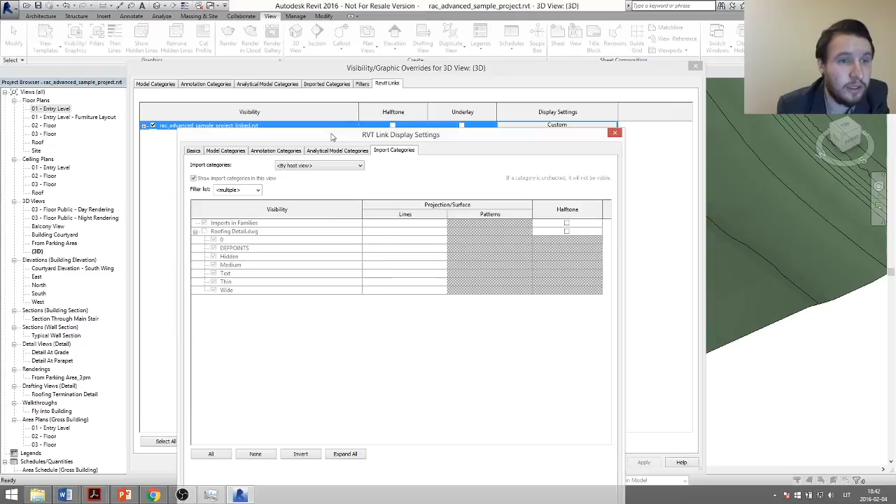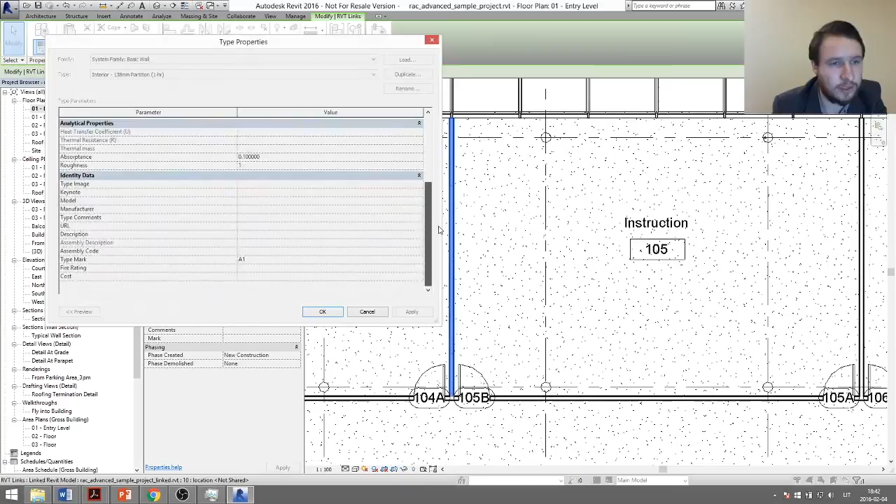So you can set up anything you want, except that you cannot select those elements one by one and change the settings. You can only select it, but you cannot do anything inside of that model. Just select it to check all of these parameters. You can see the type parameters of the element, but you cannot change them. There's also a possibility to copy these elements, just select them and copy them into our project from the linked file.

Sorry. If you want to copy the grids, to have a basis for a structure, or to copy walls or floor slabs, in the Collaborate ribbon there's the Copy/Monitor tools. Oh sorry, it was too fast. So I can select Copy/Monitor and select link, and if I select a link, I can copy elements. I can select multiple, and I just have to select all the elements that I want to copy from this linked project file into my own project file.

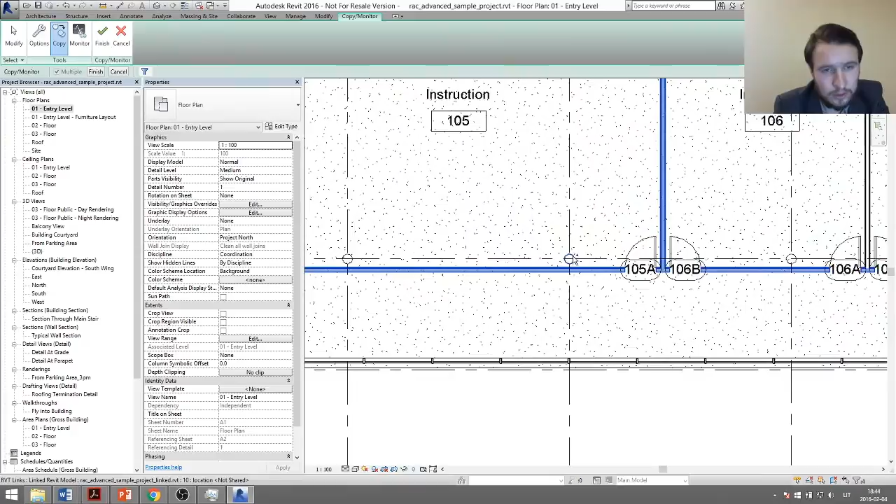I can select the grids, walls, columns, but this tool doesn't work for all elements, only for the main structural elements like grids, walls, slabs, roofs, and columns. I guess this is it, because this is how Revit works right now. So if I select all of these elements, I click finish, detach, okay. So you see it got all of these marks.

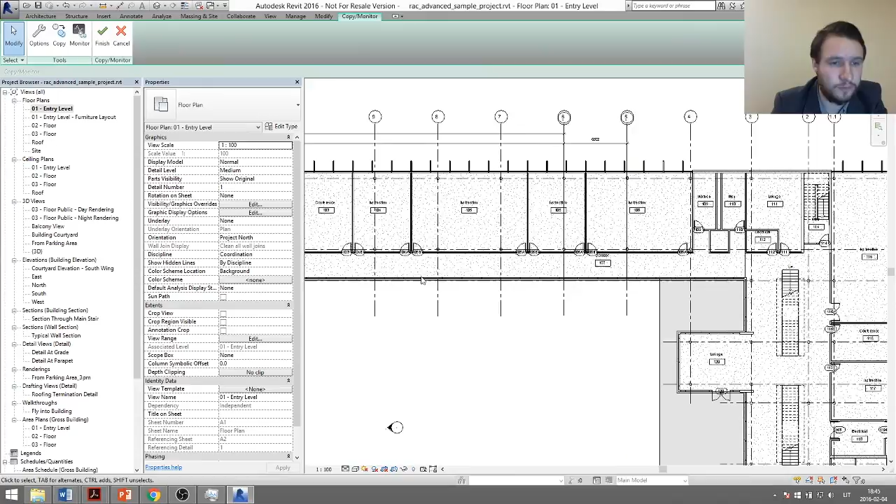It means that it's monitoring those elements, and if in the original file those elements change, I will get a notification that those elements are changed, and I have to modify my own elements. But I can stop monitoring if I just want to see those elements. So finish. Now, you see, I can hide that model, and you see the elements that I copied are already inside the model, and I can use them. I just hide it for a second.

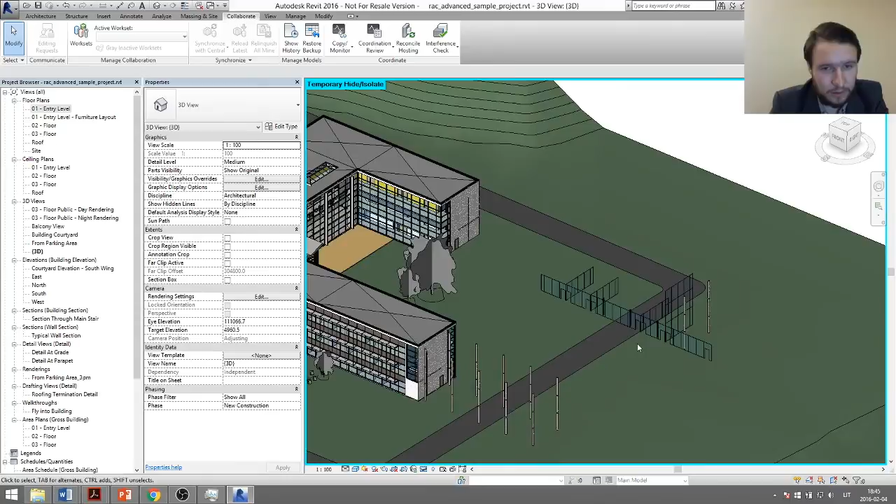If I hide it, you can see I can now use it, change the parameters, change all of the settings of these elements one by one. So you see it's copied. Yeah, everything works fine. And so